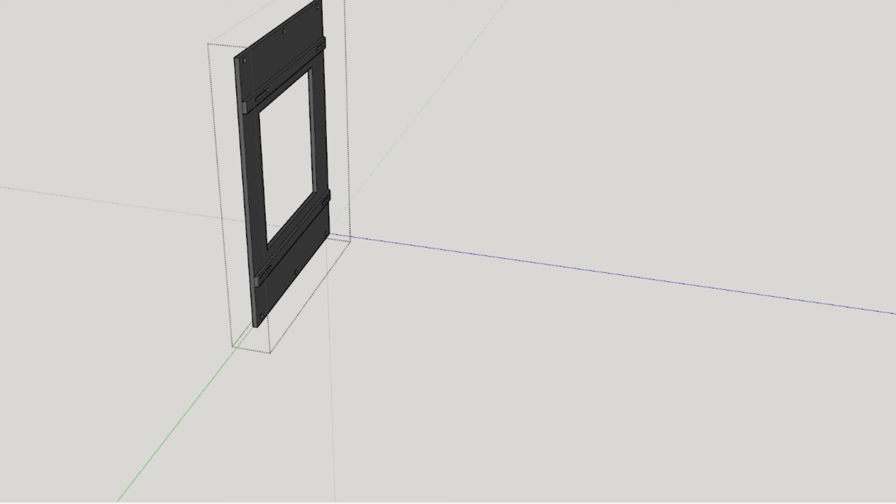I started off by making the plate for the motherboard, and I made the holes a bit longer than they really needed to be just to have some room to adjust the final position of the board, making sure to leave enough room in the top as well to fit the fan I had in mind. Then I copied the dimensions to the opposite side so that I would have equally sized panels. I did some measurements to make sure I had enough clearance to the graphics card and made a mounting plate for the SFX power supply.

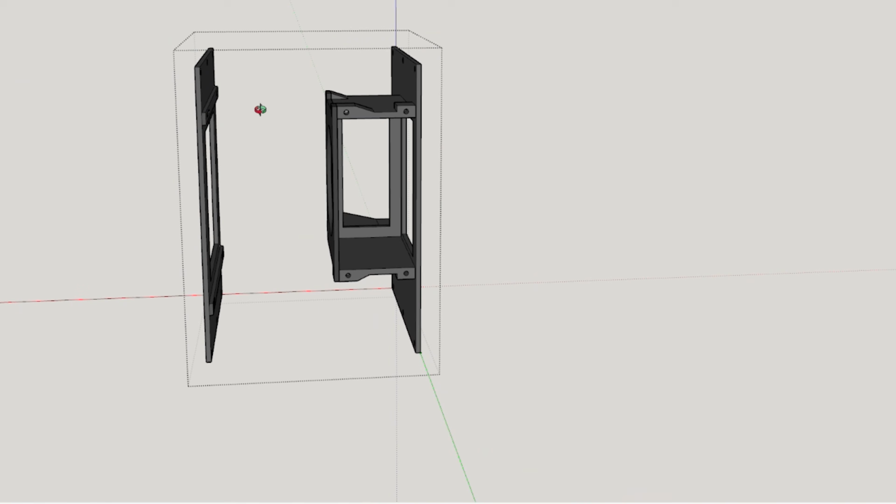Then I had to make a base plate with mounts for the side panels as well as having ventilation holes and feet to lift the intake vent off the table. Then I made a top plate for the 140mm exhaust fan and for attaching the side panels to the top. Because I wanted the air to be forced as much as possible through the case, I made these rear plates to cover up all the open space in between the power supply, motherboard and the GPU, just to make sure the air was sucked through the bottom instead of just in through the back.

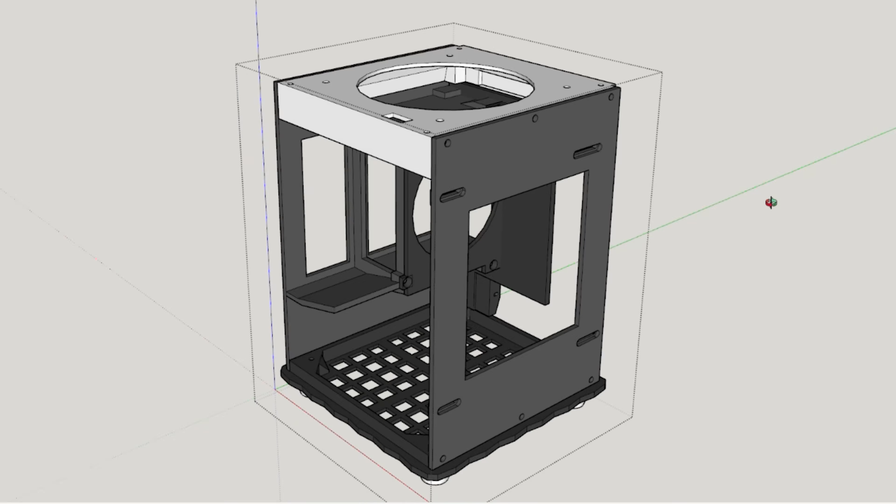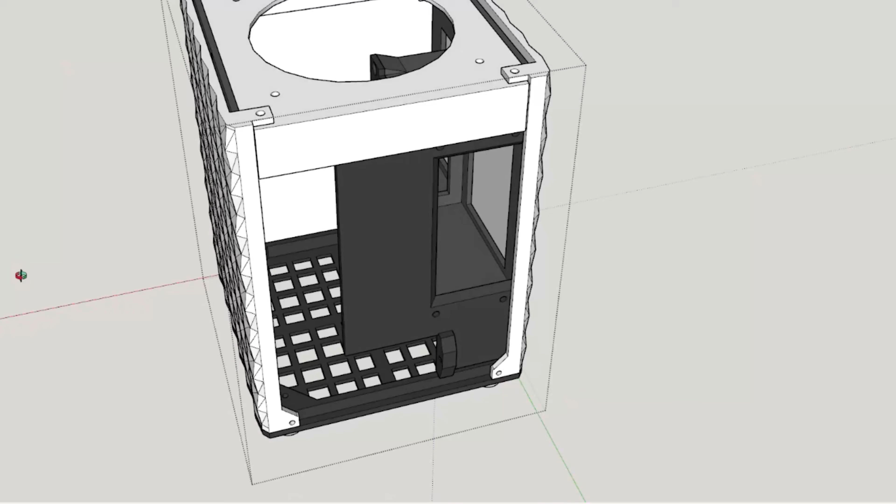I also made this fin on the power supply plate just to force as much of the fresh air as possible to the CPU cooler instead of just going straight up cooling nothing. Then it was onto the outer shell. The outer shell is mainly put together with a bunch of 30 by 30mm squares that I put together to form this super cool looking 3D square pattern and completes the whole look of this build. I made sure to keep a bit of clearance to the frame so it would slide on easier during mounting. I would also make holes that go into the fan mounting plate to bind everything together, as well as holes in the bottom plate to lock the cover in place.

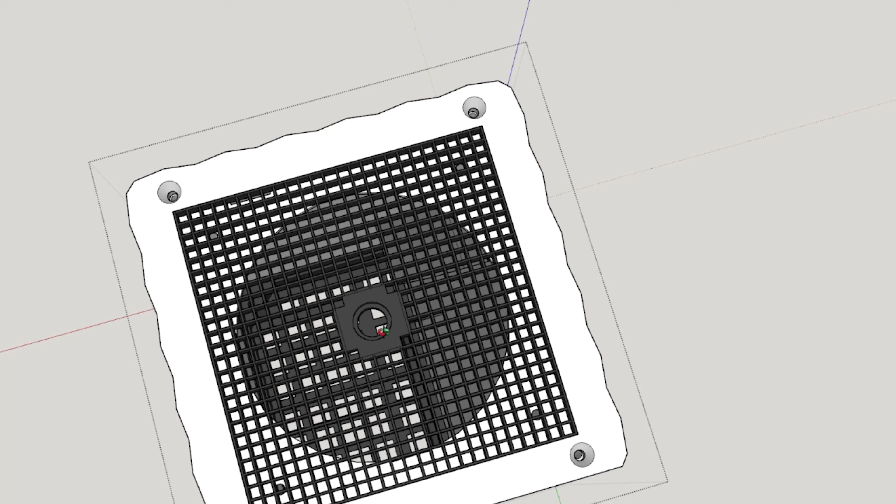The last piece to design was the top piece, where I just traced the pattern of the outer shell and made a plate with a big open square in the middle, and then designed the air vent piece separately with the mounting hole for the power button, as this would be printed in a different color. The cool thing about this design is that it could be printed in any color you'd like, and there's a bunch of cool color combinations you could be printing to fit your style. Here you have some examples of other color combinations. As you can see, there are many cool designs you can do for this build.

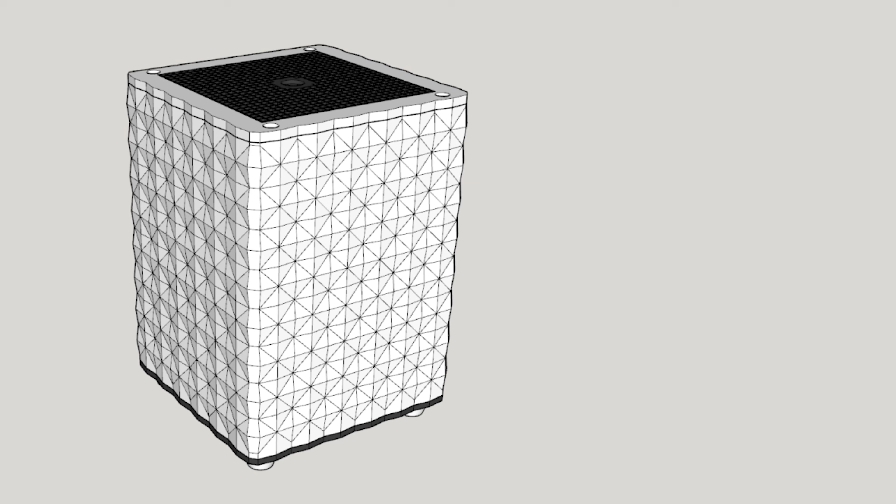A few things to note is that the maximum GPU length you could fit in this case would be about 175mm. I designed this case specifically for the parts I had available, and the one I used had a length of 170mm. Also, make sure your filament is dry before printing this, as I did not dry mine, which resulted in tiny blobs all over the finished look. It's not critical, but it definitely looks better if the blobs are not there.

Now, let's see a little bit about how this thing is put together. I will first go through the specific parts I used for this build. I will also towards the end shortly go through some performance testing and hardware temperatures, just to give you an idea of what this specific setup is capable of. For the parts used in this build, we've got this Asus ROG B460i Mini-ITX motherboard, an Intel Core i5-10400 processor. We've got the Noctua L9i CPU cooler.

For the graphics card, I used a Gigabyte 1660 Super ITX graphics card, and I've got 16GB of HyperX DDR4 RAM. The power comes from a Corsair SF450 SFX power supply. There's no room for hard drives in this setup, so I've used 1TB of Kingston A2000 M.2 SSD as storage for this build. And last, the exhaust fan I used is a Noctua 140mm PWM fan.

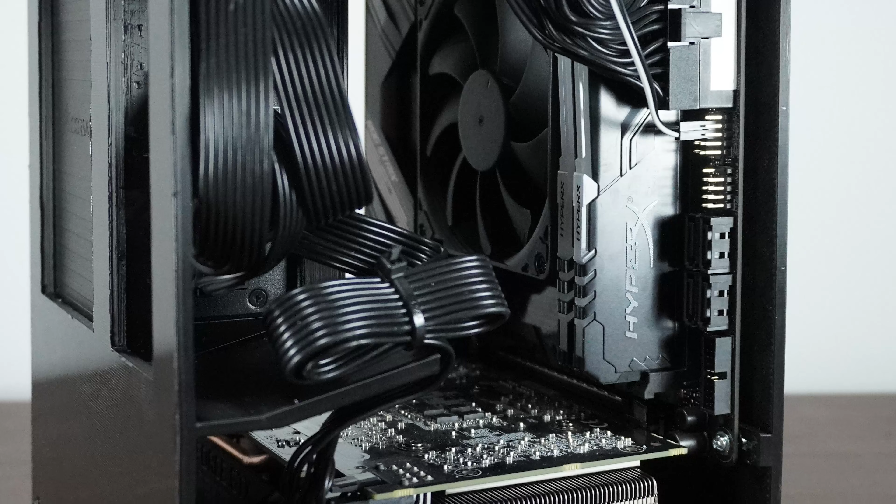I'm currently in the planning of another 3D printable ITX case that will be a little bigger, but this time leaving room for a bigger graphics card and a cheaper ATX power supply, as well as extra storage.